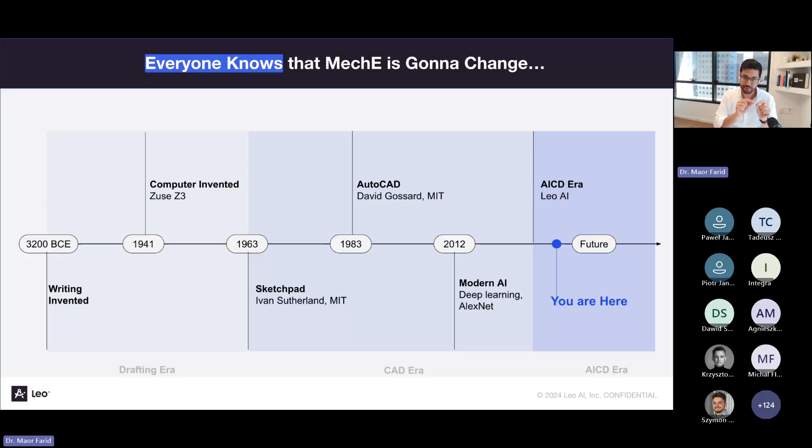Now modern AI was introduced. We are here. So it's inevitable that AI is going to change how we're working. This is what we call AICD, the AI-centric design era, not only CAD-assisted design. But this is hype, or this is vision, aside. Let's talk about reality, right? How our profession looks like today.

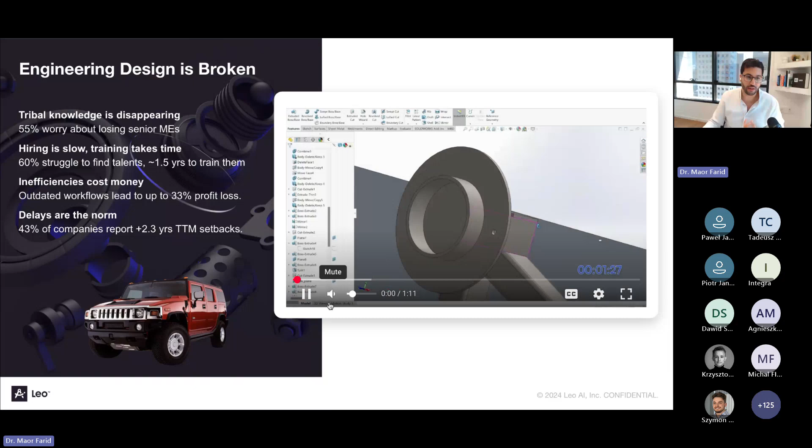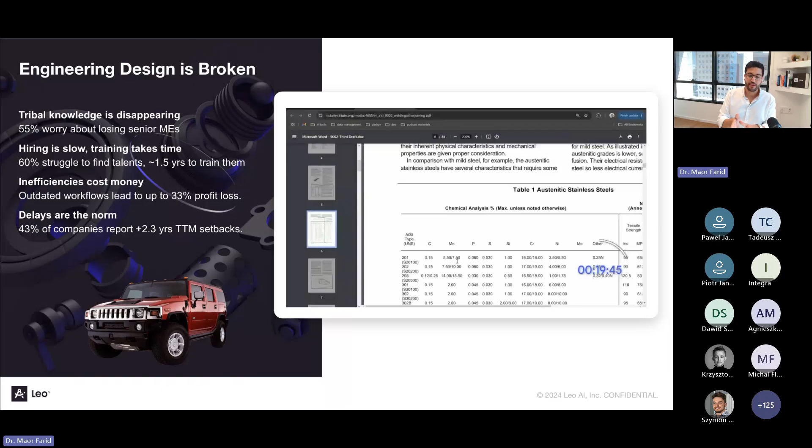Us with 10 years of experience trying to add a bolt to an existing Hummer vehicle. And as you could see here, his process is so broken. He's spending a lot of time.

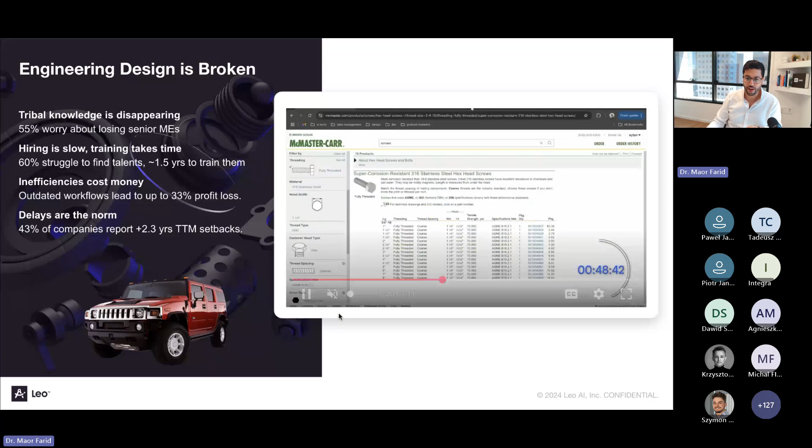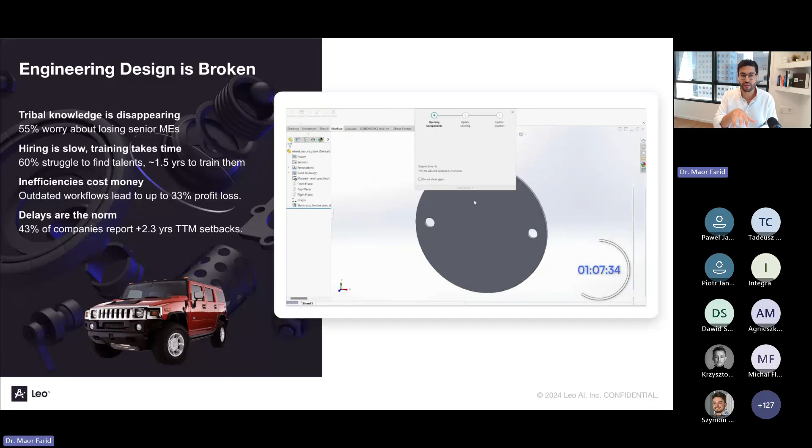So he's going through his CAD, measuring the hole diameter. Then he's going to Google, trying to find the right von Mises stress formula because he doesn't remember. He's going to his PLM or his organizational data sources, trying to find what's the safety factor for this application. Then when he wants to run the calculation, he's doing an Excel spreadsheet, checking if it is correct.

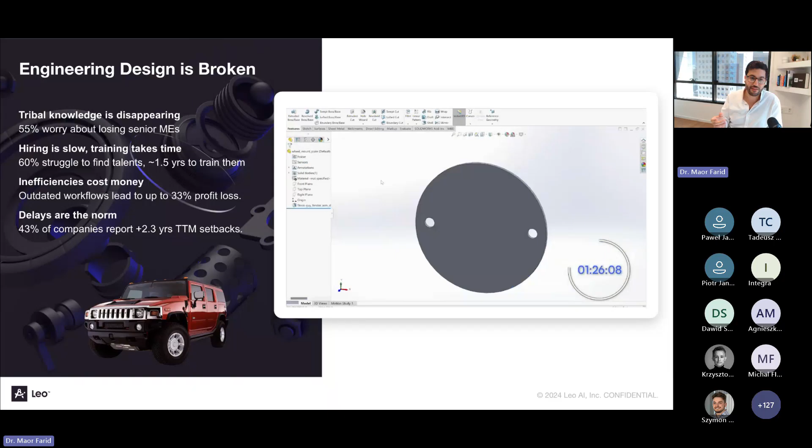Then he's going to his PLM, trying to find if the bolt is there, or online catalogs. See how much time he is investing just to find the simplest piece of machine in the world, just a bolt. In this case, 1 hour and 52 minutes. And he has 10 years of experience in building this kind of machines.

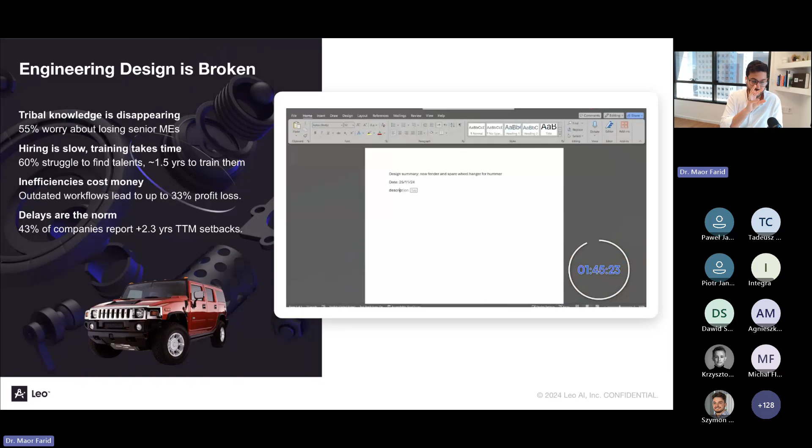So where is our AI, right? Developers have their own GitHub Copilot, and even lawyers, oh my God, even lawyers have their own AI. It's called Harvey. What about us? Why do we need to do all this legwork, all this tedious work? But before we talk about the solution, what really is the problem?

The problem is not SolidWorks, even though, right, it crashes every 2 hours. I'm sorry here for the SolidWorks enthusiasts. It's not SolidWorks. It's not Onshape. It's not PDM. They're good pieces of software. The problem is much deeper for us mechanical engineers.

For us engineers, engineering knowledge is still locked in vaults. It's locked in the brains of the older engineers, right? At the end of the corridor, the older guys that only they know how to choose coating for our bolts or whatever. It's locked in the mountains of documents that you wrote in the last 20 years of the company since it exists. It's locked in the CAD data that you designed.

For example, if you design a battleship and you want to know what's the minimal thickness of the hull of the ship, it's not written anywhere. You need to open the assembly on SolidWorks and measure it. So a lot of information is in the CAD itself. And it's also locked in the Bibles of engineering, right? All the Shigley, all of those giants.

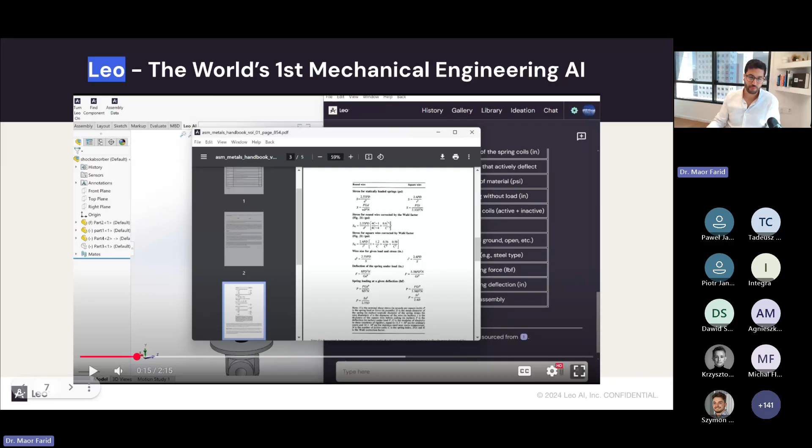So when it shows you what's the formula to use, you click on it and you see the formula in the book. And now you feel confident with the decision. Then you don't need to run an Excel spreadsheet with all the formulas. Leo finds the formulas, runs the calculations for you, and provides you with the bottom line table with all the values of all the constants that you need. When you want to see a graph, you just ask it, and Leo provides you with a graph.

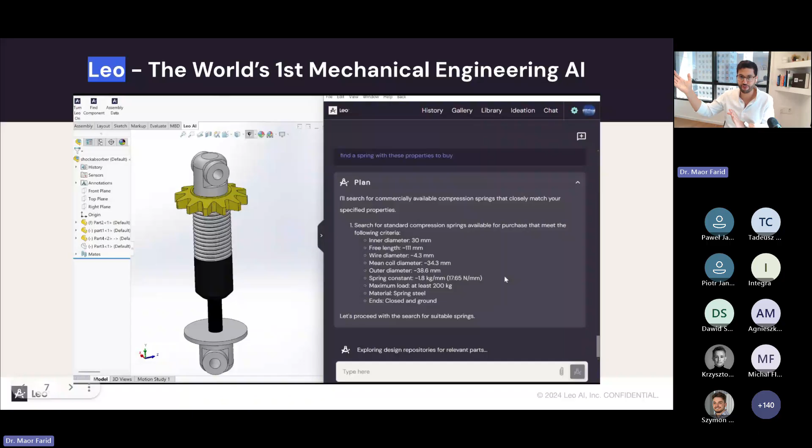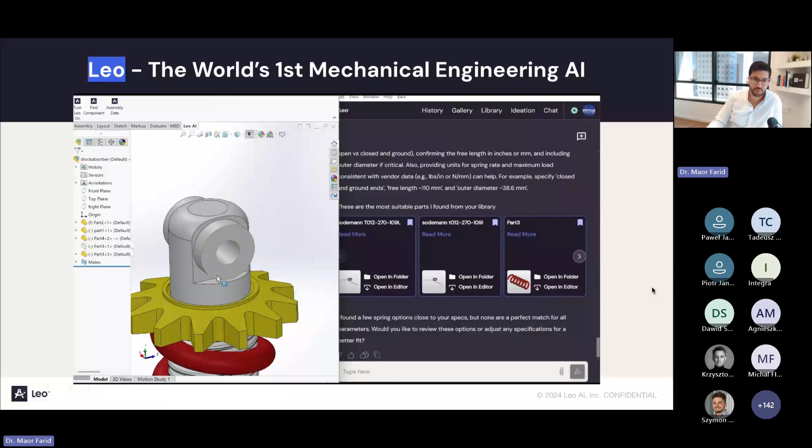If you want to buy the spring, Leo tells you, here are the vendors. Here are the parts that you can buy from vendors. However, if it exists on your PLM, if there is another engineer in Germany or in France or in other regions of Poland that already designed it for you, Leo finds it, and when you click on it, it opens up in your CAD. And as you could see, it's not a surprise, they're a good fit, right? So this is it in a nutshell. Shimon and the team are gonna show you more things.

But let's take a step back. So why is Cursor a multi-billion-dollar company? I mean, the AI for developers is basically using ChatGPT behind the scenes. And Harvey is the same. And why is Leo ramping up and skyrocketing for mechanical engineers? There are a few things in common for Harvey, Cursor, and Leo, the vertical AIs, like we call them, the domain-specific AIs, versus the generic tools, the ChatGPTs, the Claudes, the Gemini. There are three main things, right? Context, integration to workflows, and security.

So Cursor is integrated into where the developers are writing code. The coders don't need to go to ChatGPT on another screen and come back. And it also understands their code. Likewise, Leo is connected into your PDM, PLM, understands what you already designed, and provides you things with context. It provides you with parts like you used to choose parts, or answers like you used to find answers. It has integration to where you are usually accustomed to work.

In our case, it's your PDM, or it works next to your CAD. And security: all of those vertical AIs protect your security like the most precious thing in the world, while the generic tools like Claude and ChatGPT are training on your data. In our case, there is another thing though. While code and legal documents are textual documents, Leo needs to understand CAD as well. So for us, there is another distinction from ChatGPT, which is we are the only one to understand CAD, right?

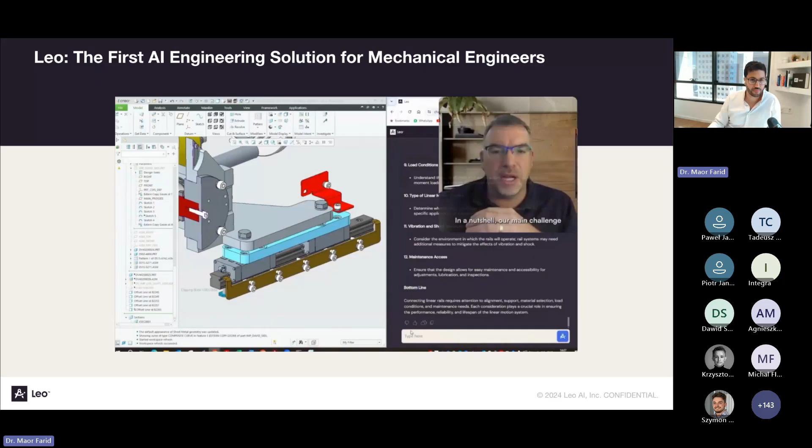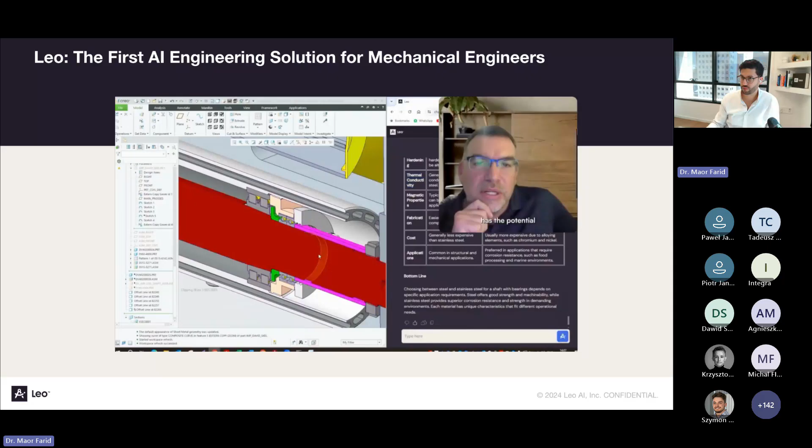In a nutshell, our main challenge is to keep driving innovation, to work faster and smarter, to avoid mistakes, and to deliver high quality products. And I think that Leo can help us to do this. I'm confident about this partnership. I think that this process will improve our design. I really think that Leo has the potential to change the way we think, we do engineering, we design better products.

It's at least going to take me 7 to 21 days to get what I was able to create with Leo in like 3 hours. I mean, I'm probably taking away about 10 to 12 hours of pay. So somebody charging me $250 an hour to design, you know, that's $2,500 that I'm saving.

We had this project which involved mechanical questions for a medical equipment we designed for some startup, and we were looking for specific ways to make the product smaller and more efficient. And I think Leo gave us a few different ways of thinking and finding the solution that was right for our clients. When I have Leo 24/7, I consult with it all the time. We use Leo on a daily basis for small questions, but all the time.

Whereas if I need to consult with an engineer, I would wait a few days till I get a few questions to ask at once, or till I get the answers back. Could take a few days. We're less dependent on outsourced engineers. We get answers in a few minutes instead of a few days. And much more than that, it opens our minds to new directions of thinking for us and for our users.

How can we make sure that when you are looking for something, you have been leveraging all the human experience on mechanical engineering? This is what Leo AI does. And last but not least, if we can make sure that we have the CAD integration working well with applications such as Leo AI, it would be perfect. So these are the key things that could be right away in production and used by the users, because they are dying for this progress. It's not a question of is it easy to use or whatsoever. No, it's a question of the value you get using solutions like Leo AI.

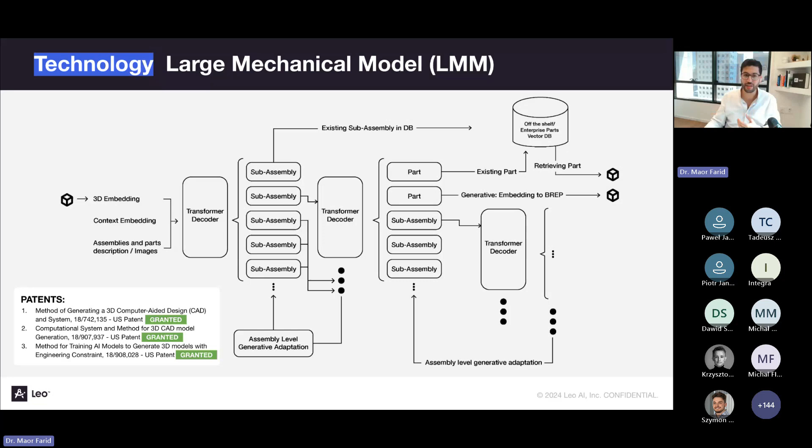And we call it the world's first LMM, large mechanical model. So if ChatGPT and Gemini are LLMs, large language models, and they're taking words as tokens, right? And they're connecting words into a sentence that makes sense, or a pizza recipe that makes sense. Our LMM knows how to combine machine parts and to understand geometry and assemblies in an engineering way. And this is just the beginning.

Just before dropping off, I want to share with you where we're going. So far, as you could see, we don't believe that engineers are gonna use text to generate full products. I think we're already mature enough to understand that text to CAD or text to products is a Hollywood illusion. Because us engineers, like me as a senior engineer, I won't trust a junior engineer to design a full car for me, right? It's not only AI, it's another entity, another person. I won't trust him or her. I want to inspect with my own eyes and hands to understand every decision made.

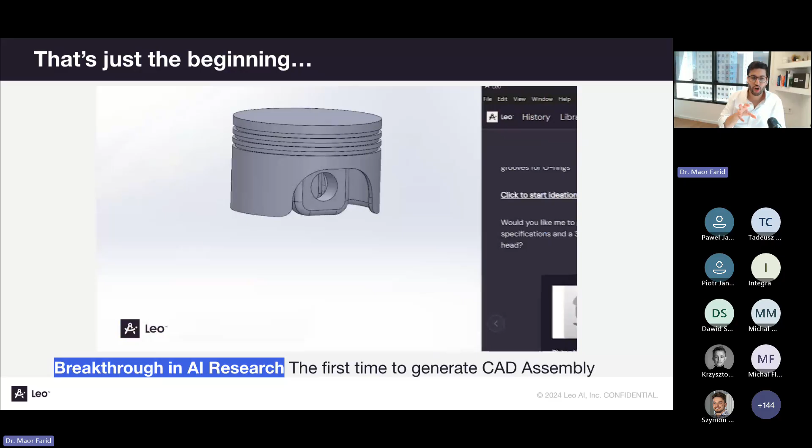But what if Leo will be able to generate small assemblies for us? Only the suspension for my bicycles that I design. And this is what you're about to see in a few months from now, just around the corner. What you're seeing here is the first time ever, as we know and for the market, that an AI model knows how to generate an assembly based on a query.

So you see on the left-hand side, Leo's imagination, right? Leo understands how a piston should look, and it finds the parts and assembles them in a way that makes sense, right? So it's gonna be in October, not June, but just imagine how fast the equation is gonna be, right? You will be able to manage another AI entity. And this AI entity of Leo will be able to do the boring stuff for you. And you're gonna lead the engineering process, the innovative process.

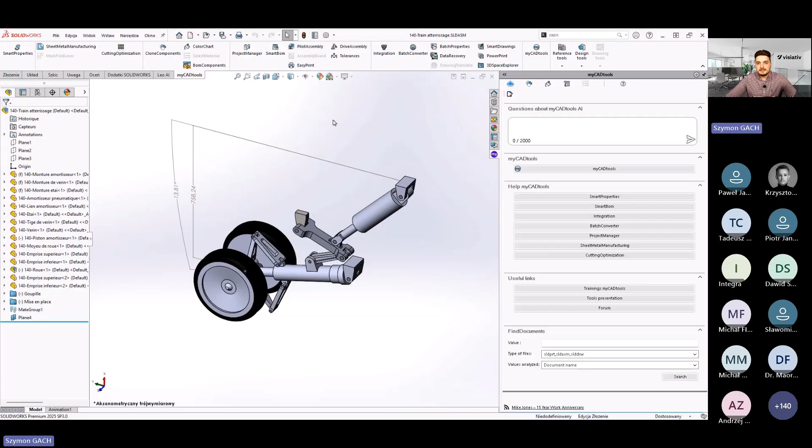Na pewno znają Państwo opcję Pack and Go. Jest ona oczywiście działająca, elegancka w SolidWorksie, ale Project Manager, który dziś Wam prezentuję, jest narzędziem bardziej zaawansowanym do kopiowania całego drzewa projektu razem z zależnościami i z rysunkami oraz z możliwością wpływania na nazwę.

My w tym momencie jesteśmy w stanie sobie wybrać, czy rysunki mają być założone. Jesteśmy w stanie odczytać informacje, czy dane części w złożeniu są tylko wirtualnymi komponentami, czy nie są do nich pogubione odniesienia. Jesteśmy w stanie pofiltrować całe nasze złożenie według na przykład części, które są elementami normowymi, których nie chcemy kopiować, możemy to sobie spokojnie filtrować.

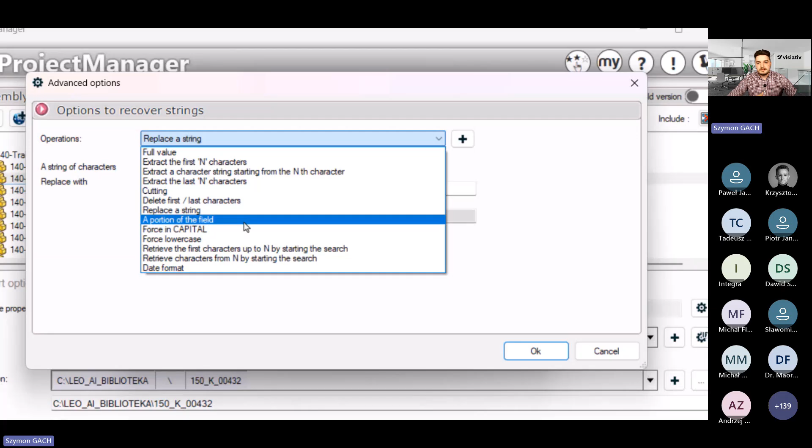Co jest też istotne, możemy wpływać znacząco na nazwę naszych nowo powstałych plików. Nie tylko dodanie sufiksu czy prefiksu, mamy możliwość również wpływania na tą nazwę, która już jest, ucięcia na przykład 3 początkowych znaków, dodania 3 znaków na początku, czy podmiany jakichś znaków. Takich warunków możemy dodać kilka, nie ma z tym najmniejszego problemu. Nasz dodatek myCADtools sobie z tym poradzi i te nazwy nam po prostu powymienia.

Mamy możliwość do sprawdzenia tego, jak taka nazwa będzie wyglądała po zmianie. Jest to oczywiście taka typowo już funkcja sprawdzająca i na to mam jak najbardziej wpływ.

Co więcej, jestem w stanie zachować całą strukturę folderową, co jest dość istotne, bo bardzo często w firmach ta struktura folderowa ma duże znaczenie, i te wszystkie opcje, o których powiedziałem, mogę zapisać jako taką templatkę moją ulubioną.

Co jest ważne? Mogę wpływać również na właściwości dostosowane plików. Bardzo często zmienią się jakieś ID, zmieni się jakaś inna nazwa, może dostawca. Jeżeli musimy zmienić te właściwości, możemy zrobić to już bezpośrednio w trakcie kopiowania, w trakcie powielania tego projektu, który wcześniej został wykonany, i podobnie jak we wcześniejszym przypadku mamy możliwość wpływania, co się z tymi właściwościami stanie, czy będą w pełnej wersji, czy będzie coś ucięte, czy będzie coś zmienione.

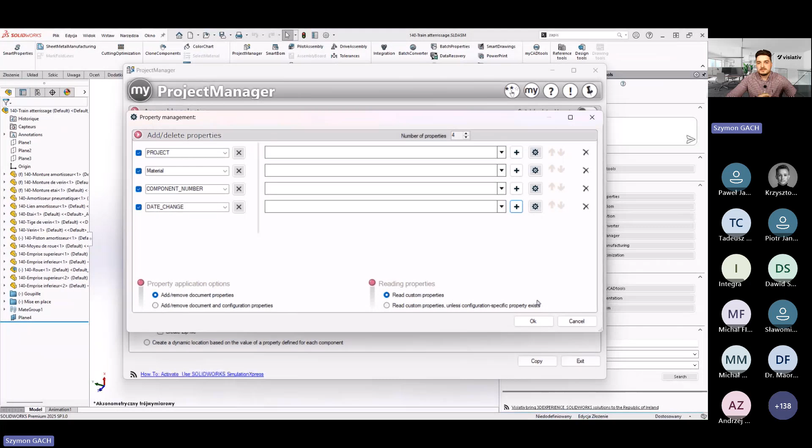Kopiujemy i szanowni Państwo, jest to chwila - kopiowanie plików, szczególnie niedużych złożeń, nie zajmuje wiele, ale mamy elegancko strukturę złożenia, mamy elegancko podzielone foldery tak jak chcieliśmy, więc wszystko jest na swoim miejscu.

Ale jak to wygląda na ten moment? Jak możemy wykorzystać już działające Leo AI do generowania modeli? Czy będą to modele parametryczne? Jeszcze nie, ale jak wygląda to w tym momencie? Postanowiłem pokazać to na najprostszym przykładzie, jaki przyszedł mi do głowy. Jest to w sumie biurko kolegi, który gdzieś tam miał jakąś podstawkę do komputera. Postanowiłem sprawdzić, jak Leo poradzi sobie z wygenerowaniem takiego modelu.

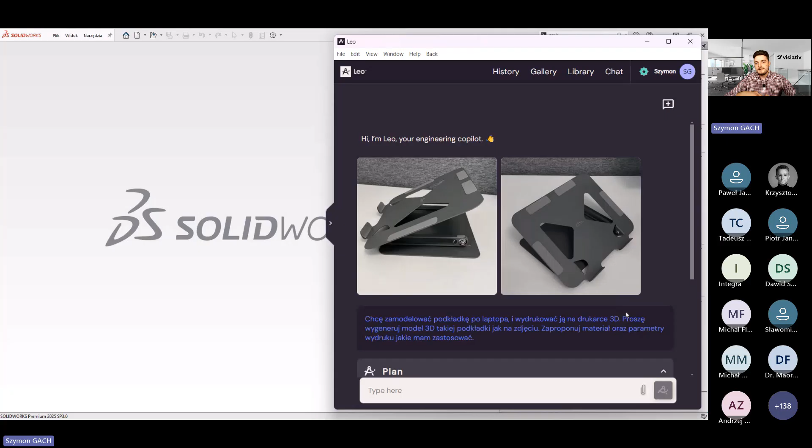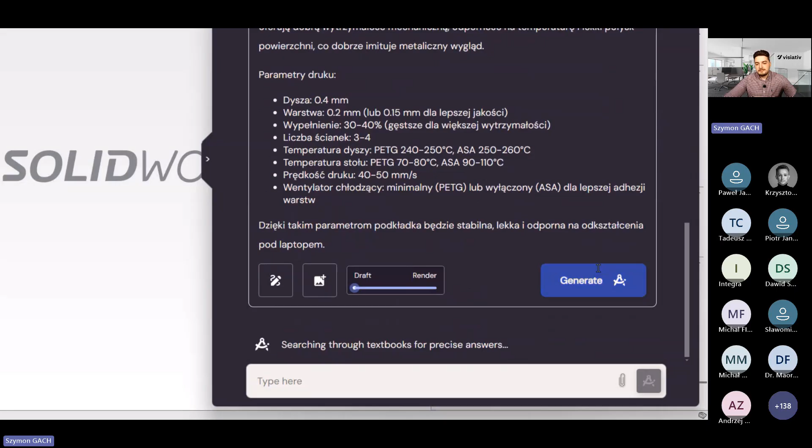Więc wrzuciłem proste zdjęcie elementu do naszego co-pilota Leo AI i poprosiłem go, żeby po pierwsze podał mi parametry wydruku, bo chciałbym to wydrukować na drukarce 3D. Podał mi tematy związane z doborem materiału, żeby materiał był w miarę wytrzymały i tak dalej. Bardzo proste zapytanie, które miało poskutkować wyrzuceniem tych parametrów, a drugi temat to wygenerowanie już modelu 3D.

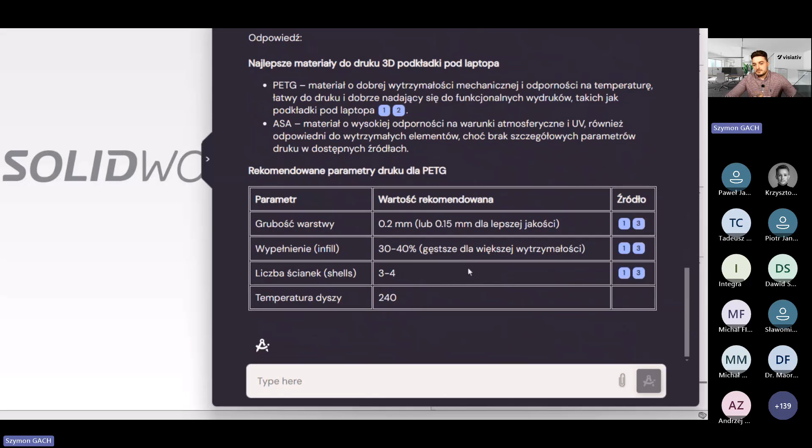Ponieważ Leo AI oprócz generowania odpowiedzi i wspierania nas, ma możliwość również generowania konceptów w formie plików takich jak STL, OBJ czy GLB. Są to 3 rodzaje, które jesteśmy w stanie pobrać, więc tak naprawdę plik STL bezpośrednio już możemy sobie wrzucić na naszą drukarkę.

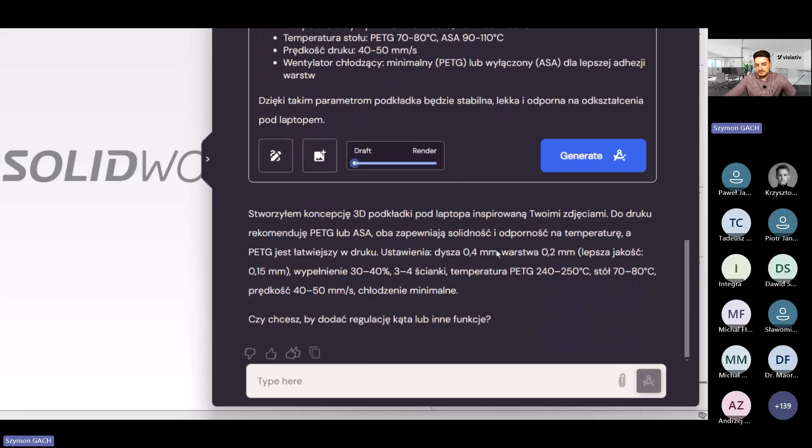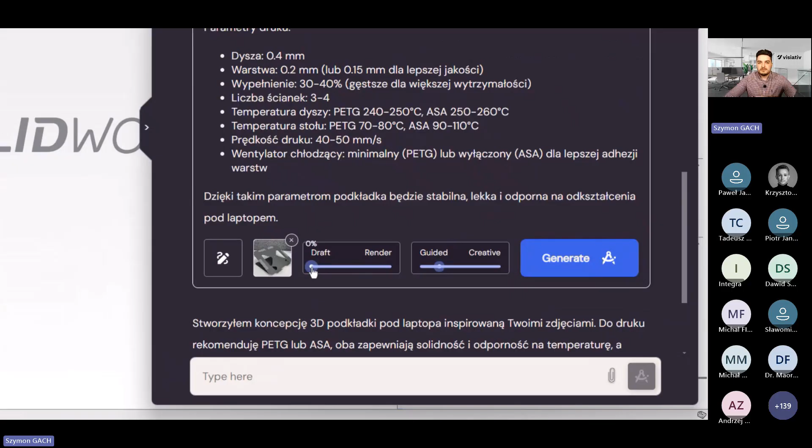To, co Państwo widzą, to jak Leo przeszukuje informacje, wyrzucił mi te wszystkie, o które go poprosiłem, i w tym momencie wrzucę mu jeszcze raz zdjęcie po to, żeby na jego podstawie wygenerował mi najpierw wizualizację opartą o mój obrazek lub o mój szkic, a następnie już model 3D.

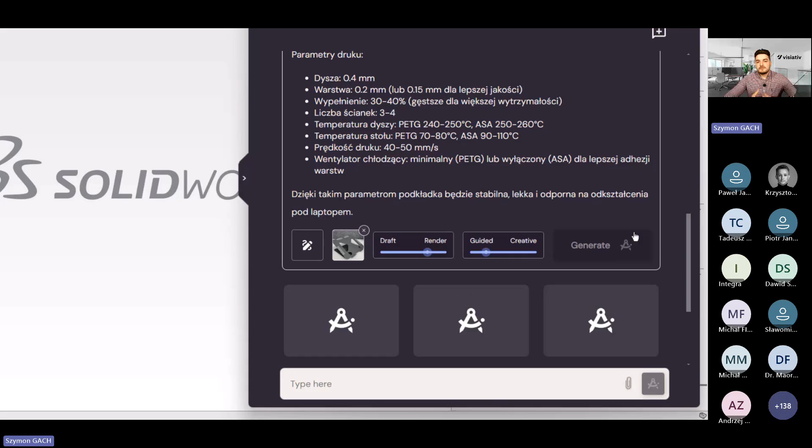Więc poczekajmy chwileczkę. On generuje zawsze po 3 modele, tak żebyśmy mogli wybrać ten najbardziej trafny. Jesteśmy w stanie decydować o tym, czy ma bardziej iść w stronę kreatywną, czy bardziej ma to być pokierowane naszym obrazkiem, a niekoniecznie wymysłem typowo co-pilota.

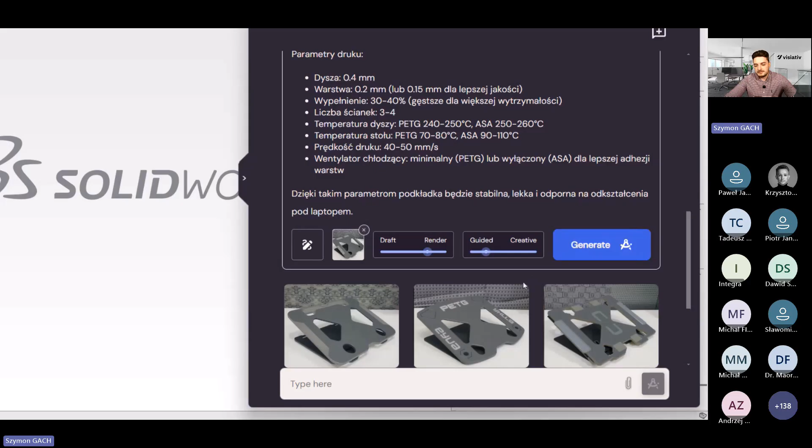Więc mamy już jakiś efekt. Wybierzmy sobie ten model, który najbardziej jest zbliżony do tego, co chciałbym uzyskać, i wybierzmy opcję generowania modelu 3D. Jestem w stanie oczywiście to powiększyć, generować kolejne warianty, ale typowo tutaj do tego przykładu wybierzmy jeden model po prostu w formacie STL. Poczekajmy chwileczkę, aż się nam wygeneruje.

To jest też istotne, o czym wcześniej nie wspomniałem, a przy testach było dość ważne. Za każdym razem jesteśmy w stanie wrócić do naszych projektów. Leo pamięta te rzeczy. Nieraz mi się zdarzyło, że chciałem wrócić jednak do wcześniejszego modelu, który trochę wyszedł lepiej, więc po prostu wszedłem w historię, wygenerowałem go jeszcze raz, coś dopisałem i Leo jakby rozumie to, co się działo z tyłu. Co niby wszystkie czaty mają, ale niekoniecznie.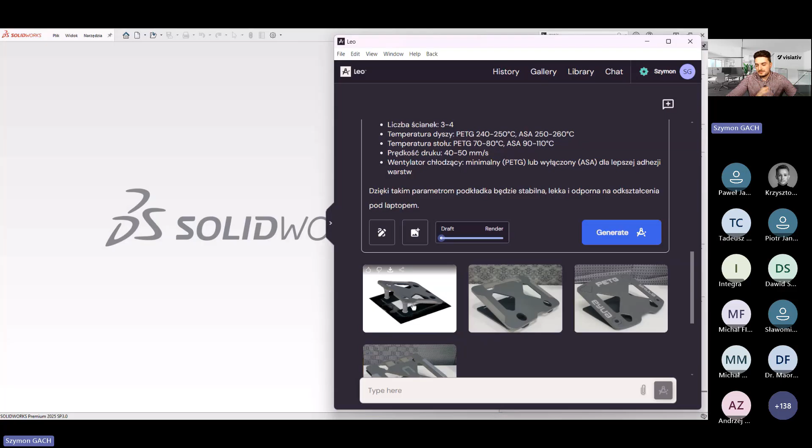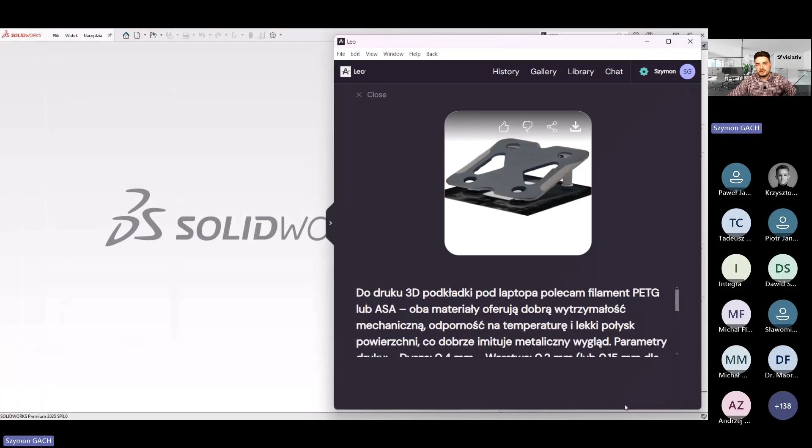Więc ten model wydawał mi się najbardziej zbliżony. Oczywiście nie wybrałem w 100%, żeby opierał się na moim obrazku, więc wyszedł w ten sposób. No i cóż, klikam jedynie co to pobranie go do formatu STL, zapisuję lokalnie na swoim dysku i za chwileczkę uruchomię go w SolidWorks, tak żeby zobaczyć, jak to wygląda, tak można powiedzieć, pod spodem. Bo jak sami Państwo wiecie, generalnie pliki importowane często są w słabej jakości, a jak wygląda nasz STL?

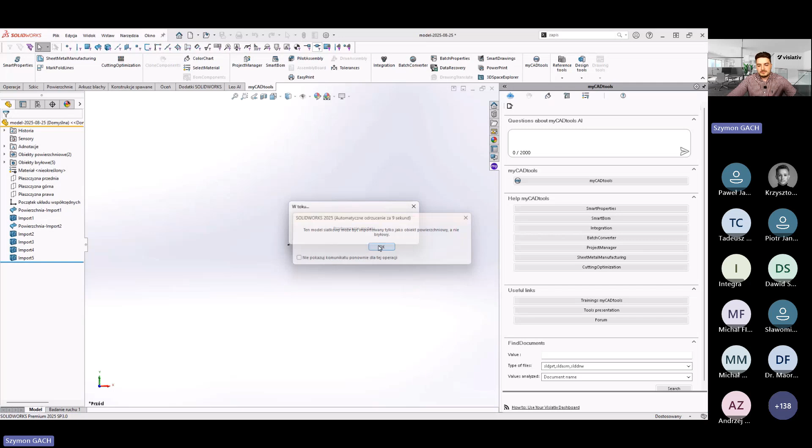No, w mojej opinii, jeżeli chodzi o samą strukturę i błędy, które mogłyby się pojawiać przy importowaniu na przykład stepów, to w mojej opinii jest naprawdę dobrze, ponieważ Leo importuje model, który jest zespolony, który działa, który nie ma większych problemów. Jesteśmy w stanie sobie go edytować, no bo jak Państwo wiecie, STL-a spokojnie możemy edytować, gdzieś coś dodać, odjąć, czy coś po prostu dorobić.

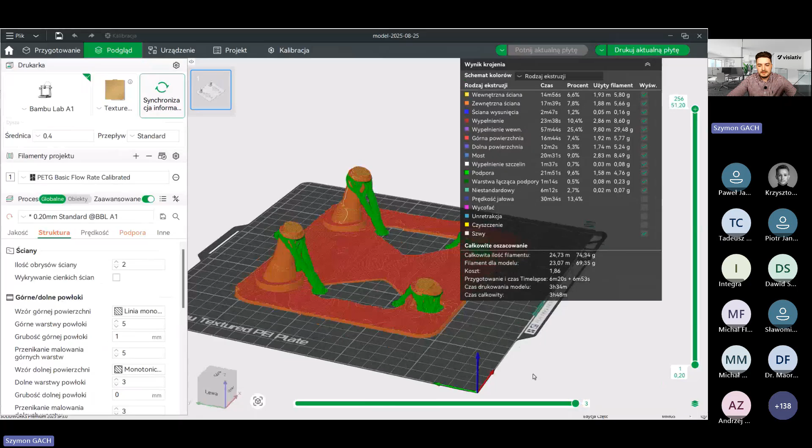I jak to wygląda dalej? Ten model bezpośrednio po krótkiej przeróbce wrzuciłem sobie właśnie na drukarkę 3D, dobrałem parametry podobne do tego, co zaproponowało mi Leo, no z racji tego, że po prostu lubię czasem sobie wybrać zwykły profil na drukarce, jest to uproszczenie, no ale generalnie mógłbym tutaj wpisać te parametry, które Leo mi zapodało. No i cóż, wydrukowałem tak, żeby sprawdzić, jak to rzeczywiście będzie wyglądało, więc uruchomiłem drukarkę, wrzuciłem i efekt właśnie widzicie Państwo na ekranie. Prosta sprawa, ale w mojej opinii może być to przydatne przynajmniej w momencie prototypowania.

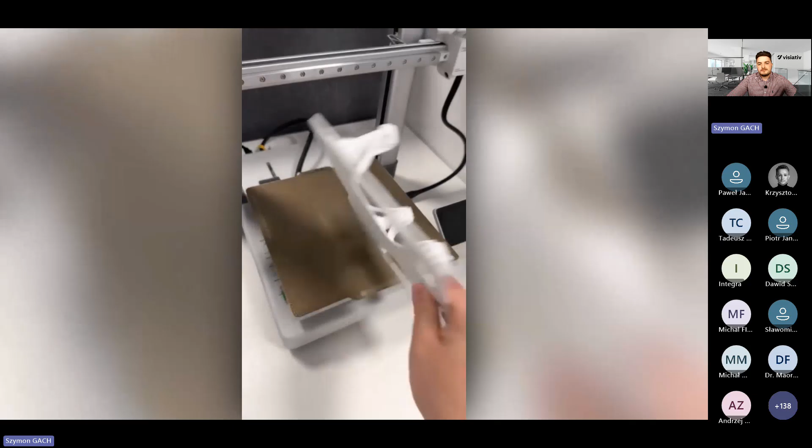Zwykłego modelu 3D, parametrycznego, który będziemy w stanie edytować? Jeszcze nie, ale koncept, który pomoże nam zrozumieć albo raczej przerobić nasze myśli na model? Jak najbardziej. Więc temat na pewno rozwojowy i warty uwagi.

Szanowni Państwo, co jeszcze jesteśmy w stanie zautomatyzować i zoptymalizować z użyciem zwykłych narzędzi, takich jak myCADtools? No bo oczywiście Leo AI daje nam duże możliwości, ale bardzo często potrzebujemy troszkę mniej i chcemy zacząć od czegoś innego. Więc masowy eksport plików, który jest takim must have, które powinien mieć każdy przedsiębiorca, można powiedzieć, bo sami wiecie, jak dużo firm i jak dużo ludzi traci czasu na eksport takich rzeczy jak bomy, takich rzeczy jak stepy, takich rzeczy jak PDF-y. Z dodatkami myCADtools mamy taką możliwość, żeby robić to automatycznie.

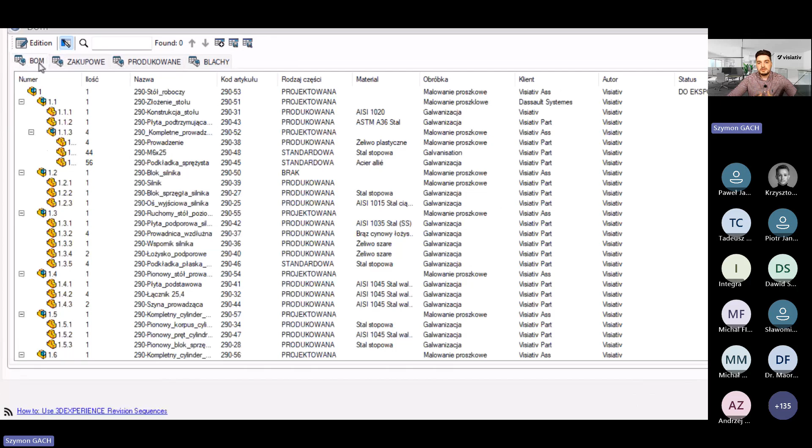Generowanie list materiałowych. Na pewno Państwo, podejrzewam, że wielu z Państwa wykorzystuje listy materiałowe do przekazywania dalej na produkcję. Można to robić w SolidWorksie, ale wykorzystując Smart BOM jesteśmy w stanie, tak jak widać na ekranie, podzielić nasz BOM na odpowiednie kategorie według właściwości dostosowanych i wyeksportować Excela z miniaturami na naszej formatce. Może być to formatka z makrami, może być to zwykła formatka Excela, gdzie umieścimy odpowiednie informacje, czy zmapujemy właściwości do odpowiednich komórek. Możemy również wpływać na te właściwości bezpośrednio, korzystając z tej wygodnej tabeli, więc narzędzie kompleksowo pozwala nam wygenerować

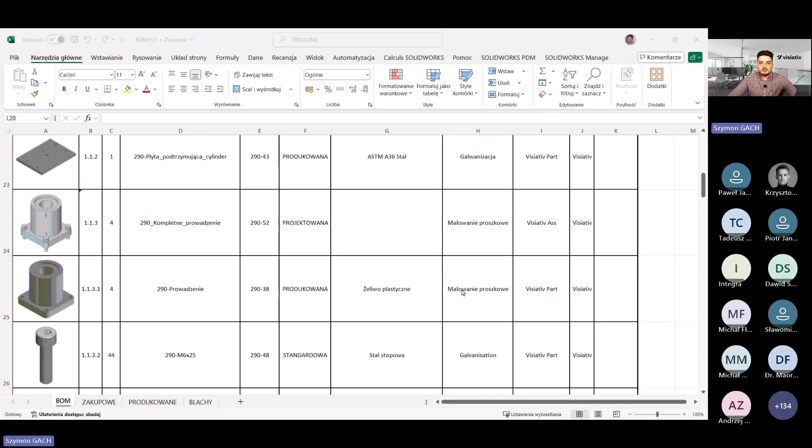kilka BOM-ów naraz, od razu do działu produkcyjnego, od razu do działu, można powiedzieć, cały pełny BOM, od razu do działu zakupowego, bez, można powiedzieć, ryzyka popełnienia błędu. Jedynie co? Wystarczy dbać o porządek we właściwościach dostosowanych, co również inne dodatki myCADtools pozwolą nam zrobić.

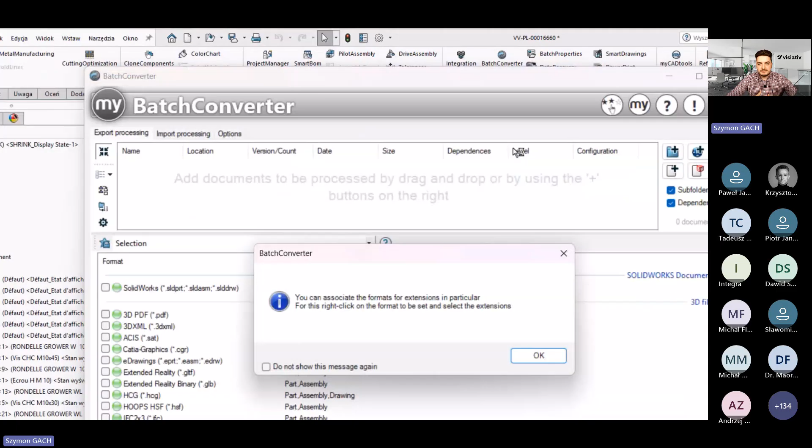Oraz dodatek Batch Converter, czyli typowy, masowy eksport plików, pozwala czy z całego folderu, czy ze złożenia wyeksportować wiele formatów naraz. Tak naprawdę na ten moment jest to większość formatów, na które pozwala nam oprogramowanie SolidWorks. Mogą to być proste stepy, mogą to być bardziej zaawansowane, takie jak no może PDF 3D to nie jest zaawansowane, ale również je możemy dodawać.

Jesteśmy w stanie bezpośrednio z tego okna dodać wszystkie zależności plikowe i również zależności, jeżeli chodzi o rysunki. I co ważne, podobnie jak w poprzednim przypadku, mamy możliwość filtrowania naszych dodanych obiektów poprzez to, czy coś jest blachą, czy coś jest elementem spawanym i możemy zadecydować również o tym, czy dany format ma być generowany tylko z części, czy również z rysunku. Bo jak sami Państwo wiedzą, DWG czy DXF-y możemy bezpośrednio już z naszej części eksportować. Więc tutaj prosty przykład, gdzie posortujemy sobie właśnie jeszcze całe nasze złożenie według elementów blaszanych i rysunków, ponieważ chciałbym wyeksportować tylko i wyłącznie blaszki do DXF-ów i rysunki do PDF-a.

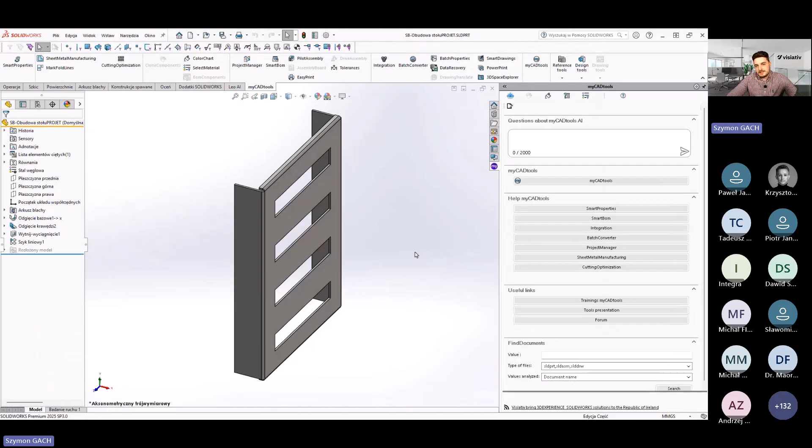W tym przypadku mamy prostą sprawę, ponieważ są to dwie blachy, jest to jeden rysunek, ale sami jeżeli mielibyśmy to robić, musielibyśmy to znaleźć, poszukać w plikach i generalnie zajęłoby nam to troszkę czasu. Tutaj nawet już z takiego ulubionego presetu ustawień jesteśmy w stanie te pliki wygenerować. Klikamy Start i w tle nasz SolidWorks uruchamia odpowiednie części i generuje to automatycznie.

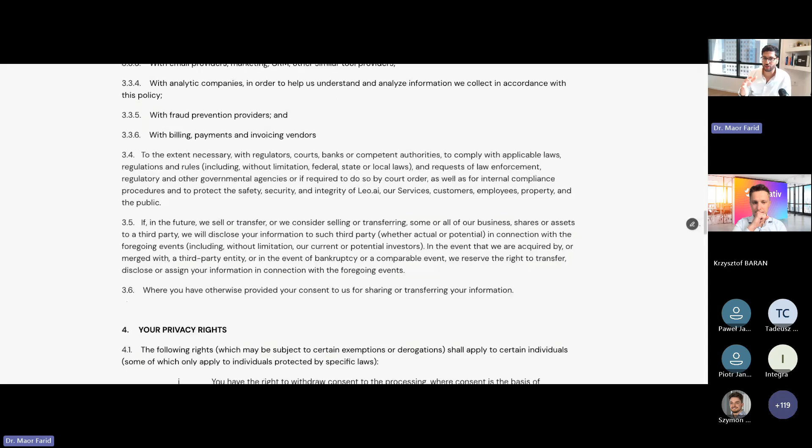Okay, but like never training on data, encryption, how we handle your data, and you could get our penetration test summary and whatever you need. And also here, there is a privacy policy. Everything that I said is transparent. It's not only words in the air. So you're covered not only technologically and IT speaking, but also legally. Here we say that we guarantee that you are super protected. Your data is not going anywhere. It's not copied. It's not cloned. It's written here also for your lawyers if needed.

Usually, what we do, the Visiativ team or Leo AI team meets you guys, the team lead or the section lead, the people that are basically deciding what tools to use. When you're happy and you approve the price, then we send you an NDA, just a legal agreement that we should both sign, and then we send you all the paperwork for the security for your IT. Then your IT usually sends us more questions, we answer them, but it takes a few days. So this is the process.

Thank you for your explanation. We have two questions. One is general. What directions do you want to develop in the short and long term? So I will start from the long term.

We are going to an age where you will be able to talk to Leo like a junior engineer. I'm not saying junior engineer because he's stupid. I'm talking about the complexity of parts that it will be able to create for you. Like a super talented and super intelligent junior engineer, I mean.

So one day you're going to tell Leo using voice, hey Leo, I need to connect those two plates, but in a way that I could detach them later. And Leo will answer using voice and text: okay, I see you can do this, this, and that, but in this design you use the bolt, in this design you use the latch. What do you choose? And you say, I don't know, give me a table with pros and cons of price, time to receive, and reliability. And Leo will run the calculation and show you, and then you will make a decision.